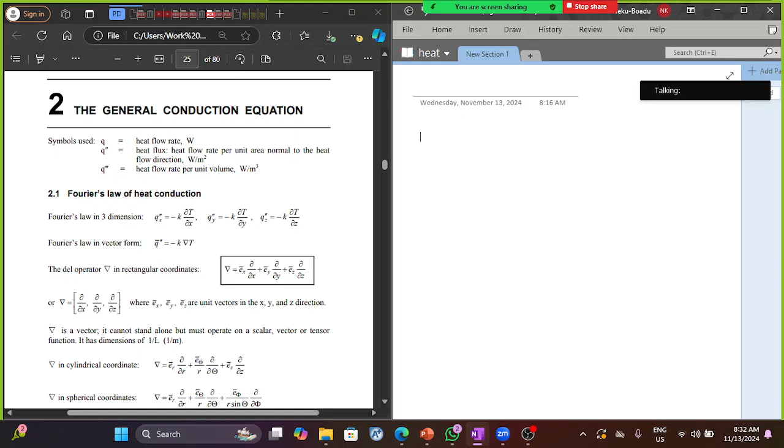So the negative sign here shows that there is loss of heat from one point to another, that's why I have the negative sign over here. Okay, so this equation can be represented in two dimension, one dimension, or three dimension. So the one we are having here is in three dimension. I hope you know what this operator means.

Okay, so writing it in vector form, we can have this equation over here. So expanding this, we can just multiply the T by whatever we are having here, so that we have the conduction heat equation in three dimension. As I said earlier on, you can also have it in two dimension or one dimension.

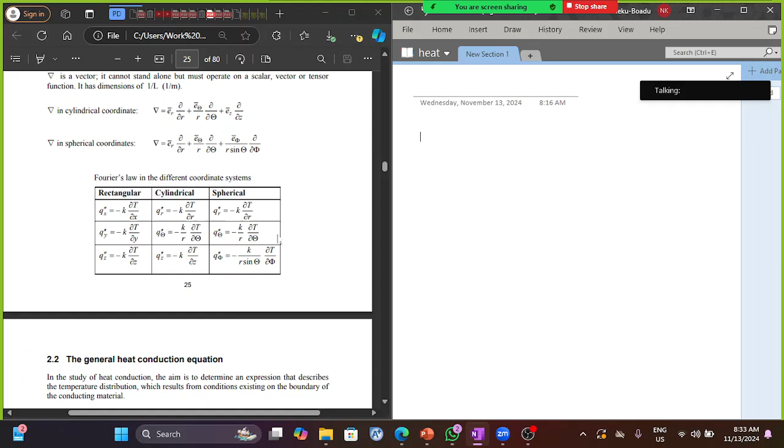Okay, so we can also have the equation in the rectangular coordinates, where we consider the x, y, z. They also have the cylindrical coordinates, which in this case we consider the radius.

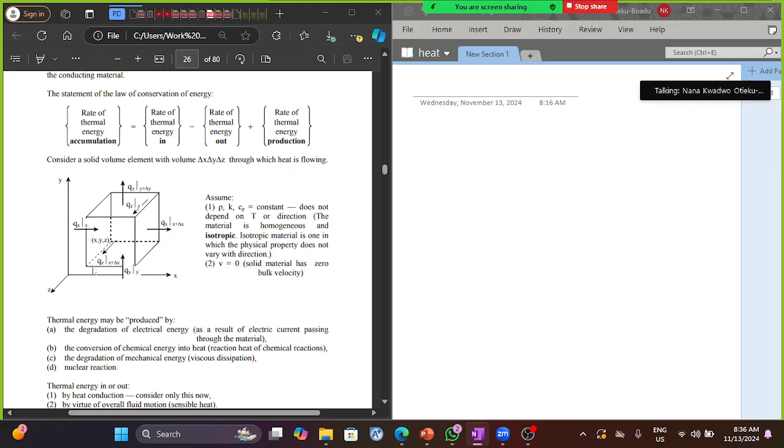The assumptions made here are that the density, the thermal conductivity, and the specific heat capacity are all constant and don't depend on the temperature or the direction. The material is homogeneous and isotropic, meaning the physical property does not change with direction, so at any particular direction they are constant. Then V is also zero, that is, the solid material has zero bulk velocity.

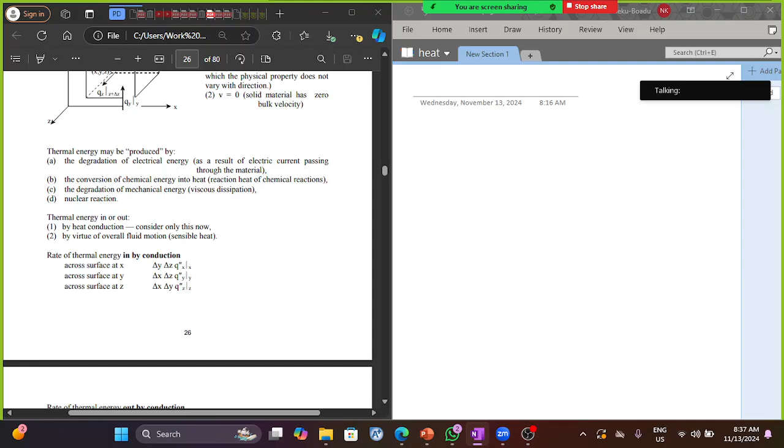So when it comes to the thermal in or thermal out by heat conduction, we only consider this for now, then by virtue of overall fluid motion, so you consider the conduction aspect and also consider the sensible heat. We are not considering convection or radiation, only the conduction aspect of it.

Since it's conduction, there should be a solid medium through which the heat can be transferred, and that solid medium should have a bit of thickness at least for the heat to pass through to the other point. So when you consider the component, for instance, in the x direction, you can see the thickness is this entire thing over here, from this point to this point. So we have one surface here and another surface over here, so from here to here comprises the thickness.

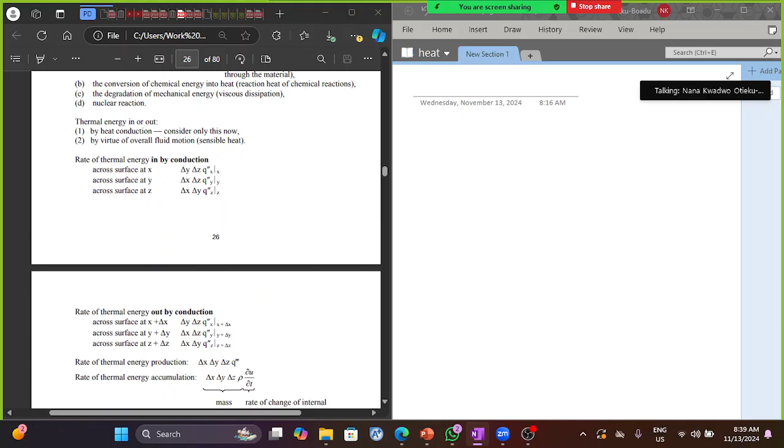We can do that across the x, the y, and the z component. When you take the surface at x, you have delta y delta z multiplying the heat flux. What we are having here represents the area, and when you multiply the area by the heat flux, you get the heat being transferred. The same applies to the y and the z direction as well.

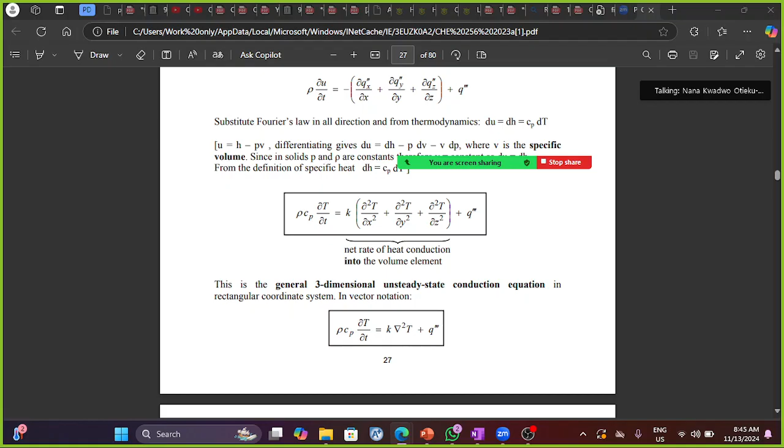When you factorize the t out over here, we get a term known as the Laplacian operator. So you can represent that term by the sign you are having over here, which represents the Laplacian operator, so what you have here can equally be represented in this condensed form. This is the representation of the Laplacian operator, so you are just multiplying it by the t to get this format over here.

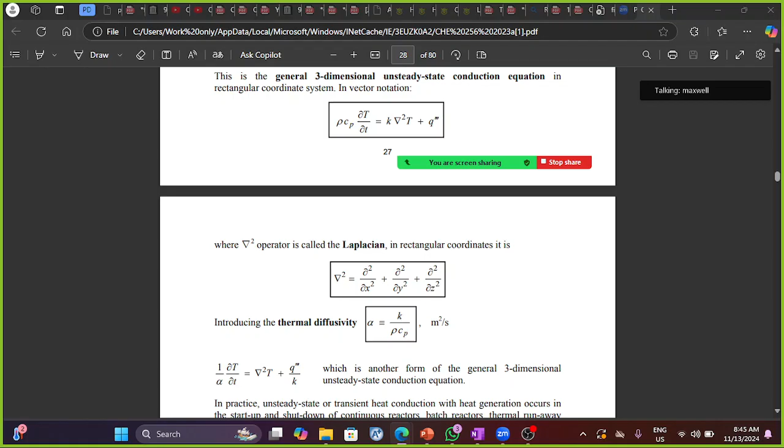I wanted to know, when you were explaining the formulas, you said the first term goes to zero. What's that term? Can you go up a bit, please? Is it this one? Where's the mouse pointer?

Okay, this term goes to zero when we are considering steady state processes.

But then you said something and I forgot. You said, is it the Q to the power of three or two? You said it goes to zero. That's when they tell you there's no production of heat, it goes to zero, right?

Yes. And I'm also asking about the one on the left hand side of the equation, you also said a term for that one. Okay, so this is the accumulation term, the rate of accumulation.

So when there's no rate of accumulation, that term is zero.

Yes, and that will happen when we have steady state processes. So if it is steady state, this term goes to zero. Thank you so much. You're welcome, I hope you know what steady state means.

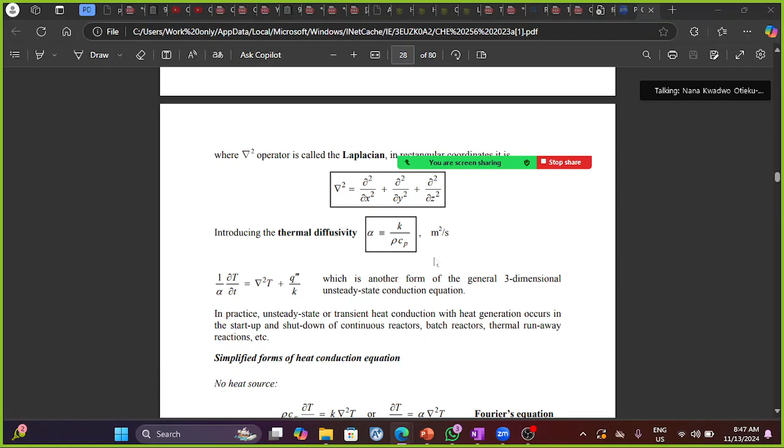We continue from here. We are also introducing another term known as the thermal diffusivity, alpha, represented by K over rho Cp, and the unit for that is meter squared per second.

To get this term, when you divide through by the thermal conductivity, this K term becomes 1, so it won't appear here. Then this one becomes per K, that is Q prime prime prime over K. Then we have rho Cp over K here.

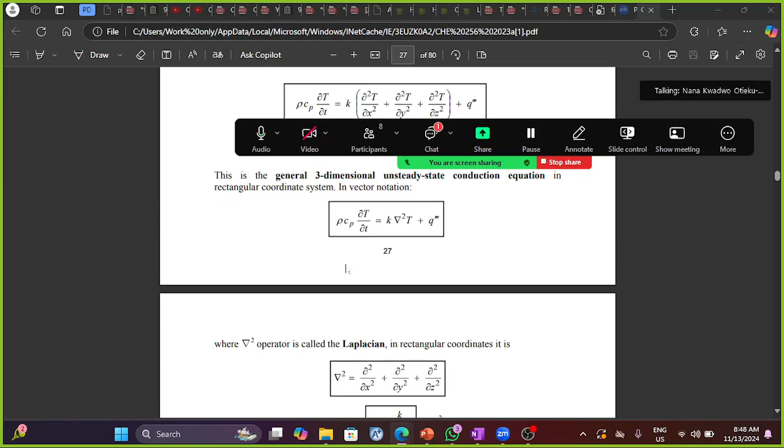We know that alpha is equal to K over rho Cp, which means that if I have rho Cp over K, that term becomes the inverse of alpha. So we are going to have this term in the 3D format here.

We have some simplified forms of the heat conduction equation. What we have here represents the general form of the conduction equation. Any of these, 1 or 2, represent the general conduction heat equation, and you can simplify it depending on the condition of the process.

In a case where we have no heat source, no production of heat, the Q prime prime prime term goes to zero, and that equation becomes the Fourier's equation.

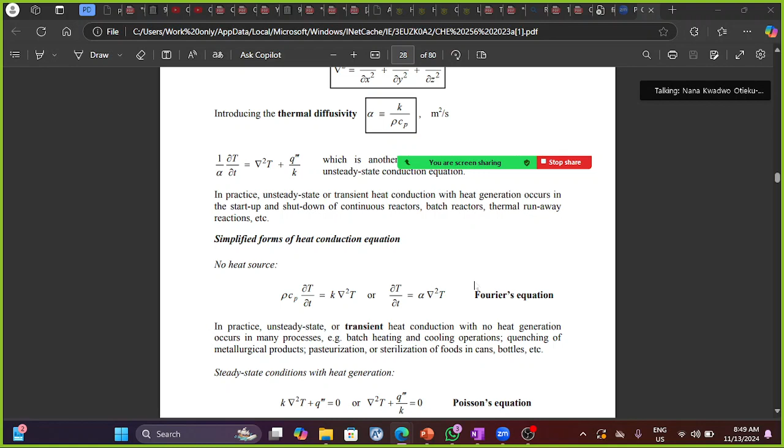Then when you consider steady state conditions with heat generation, the accumulation term goes to zero, so we only have the right side of the equation, and that equation is known as the Poisson's equation.

Then in the case where you consider steady state conditions and no heat source, we have the Laplace equation.

So to solve this differential equation, you need boundary and initial conditions to solve those equations.

Boundary conditions are restrictions or specifications applied at the physical boundaries of the system. Initial conditions are specifications applied at a specific time for unsteady problems.

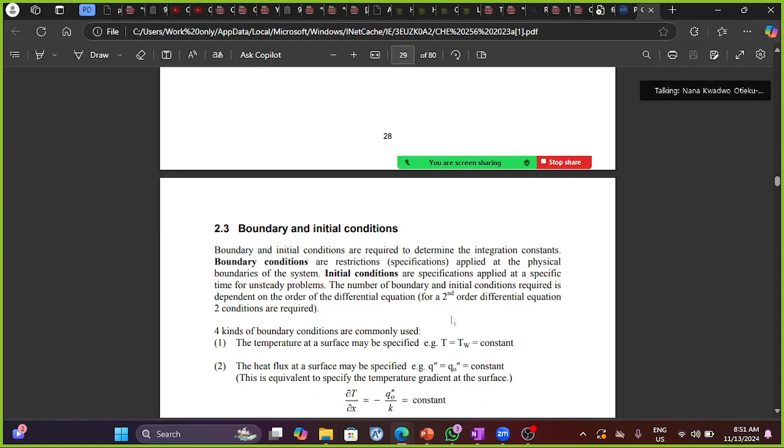So when they give you the problem and you are solving it, you get your initial conditions and your boundary conditions, and that will help you solve the differential equation you are having.

There are four kinds of boundary conditions commonly used in this course. The first one is that the temperature at the surface may be specified, and this temperature is TW, which is mostly constant.

Then we also have the heat flux at a surface that may be specified, and that's also constant.

Then you can also have, at a solid fluid interface, the heat flux may be related to the difference between the temperature at the interface and that in the fluid by Newton's law of cooling. So the solid part has to deal with the conduction aspect.

Hi. Someone is asking a question. Can you talk?

Okay, then we can continue.

The solid aspect has to deal with the conduction aspect, then the fluid aspect will be governed by the convection aspect. The law we mostly use in the convection aspect is Newton's law of cooling. So this left side represents the conduction aspect, and the right side represents the convection aspect.

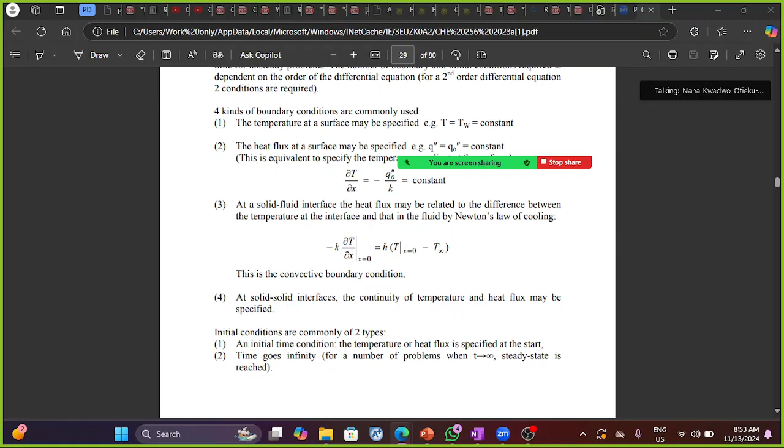Then you can also have a solid-solid interface, where the continuity of temperature and heat flux may be specified. They also have initial conditions, which are of two types: an initial time condition, where the temperature or heat flux is specified at the start, and time going to infinity, where the steady state is reached.

So these are some of the boundary conditions and the initial conditions that you can get, depending on the problem that has been given to you.

So we continue from that part. We consider steady state heat conduction in one dimension. The general form was in three dimensions, but as I said earlier, you can have it in one dimension, two dimensions, or three dimensions. In this case, we are going to consider only one dimension, and also consider steady state.

So when you go to the equation, our accumulation term goes to zero. When it comes to this topic, our objectives are to determine the temperature distribution and also to find the heat transfer rate.

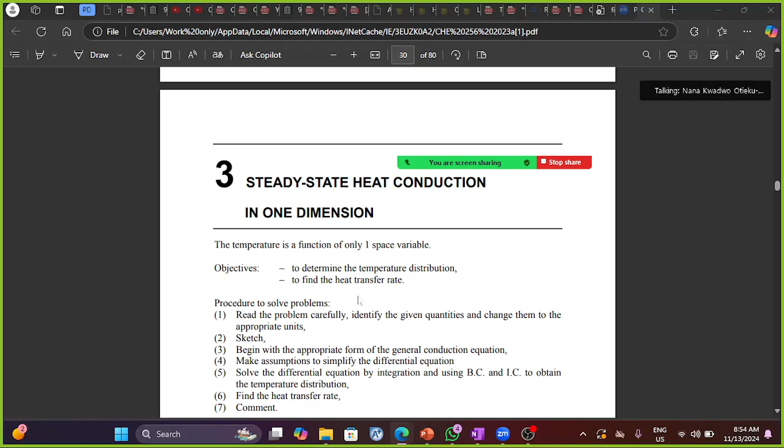We'll consider problems related to plane geometry systems, and also problems related to spherical systems. We'll first start with plane geometry systems: heat conduction in a plane wall.

The assumptions here are: T is a function of the x direction only, that it only varies in the x direction. They also consider steady state, then also consider isotropic material, that is our k, rho, Cp are constant. They also consider there is no internal heat generation.

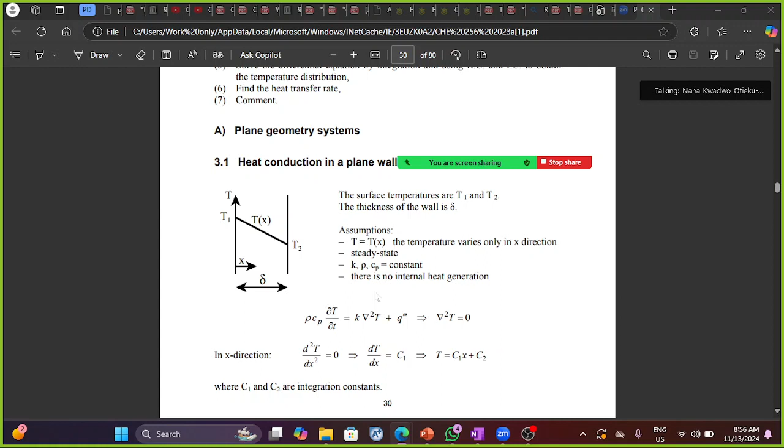In that case, when simplified, the equation gives us the Laplace equation, which is this equation over here. Writing this out, we get this term. Applying differential equation solutions, we integrate this term, and when we integrate that, we get this term over here, and whenever you integrate you have to introduce a constant.

So the first integral gives us a constant C1. Then when you further integrate this term, you get another term, and you add another constant to it, so you have C2. Solving this, you need boundary conditions and initial conditions to solve this equation.

So at this point, at the surface, we can consider when x is equal to 0. We are starting from x from this point. So when x is equal to 0, our temperature becomes T1, which is on this surface. And when x equals delta, from this point to this point, our T becomes T2.

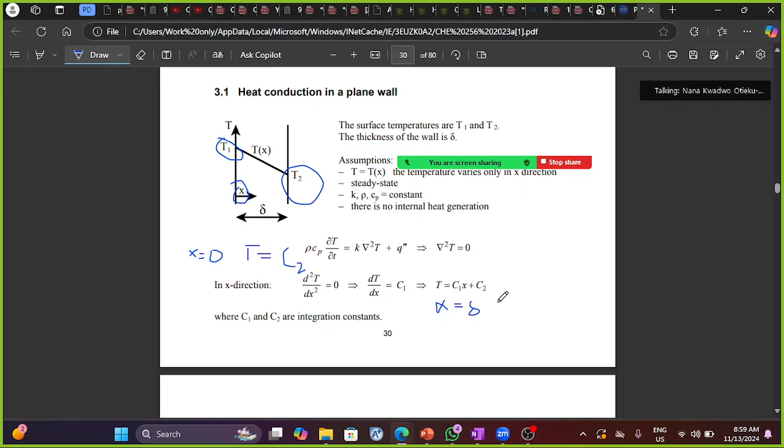And when x is equal to delta, we have our T to be equal to T2. So when you solve for C1 and C2, you have boundary condition 1: when x is equal to 0, you have T equal to T1. Then solving the equation, you have T1 equal to C2.

That is this term at this point. Then when x is equal to delta, we have T equal to T2. So in this case, we are going to have T2 equal to C1 delta plus T1. So substituting and solving for C1, we get C1 equal to T2 minus T1, over delta.

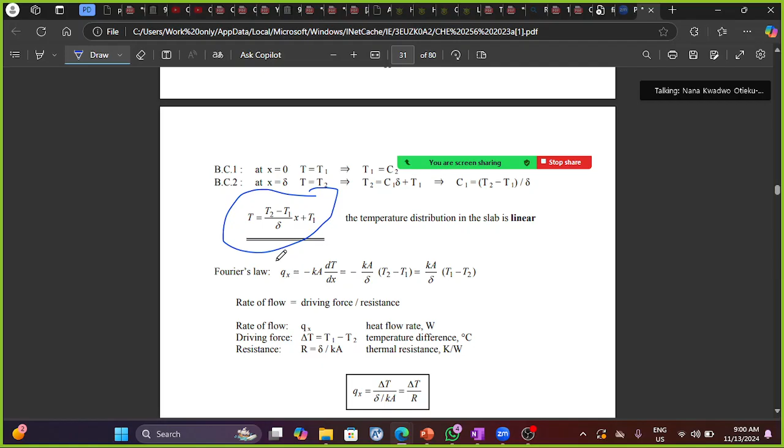So when you substitute C1 and C2 back into the equation, we get this solution. Looking at this solution, we can see that the temperature distribution is linear.

Are we okay? I mean, I just have it here. Look, I'm about to restart it for it to work.

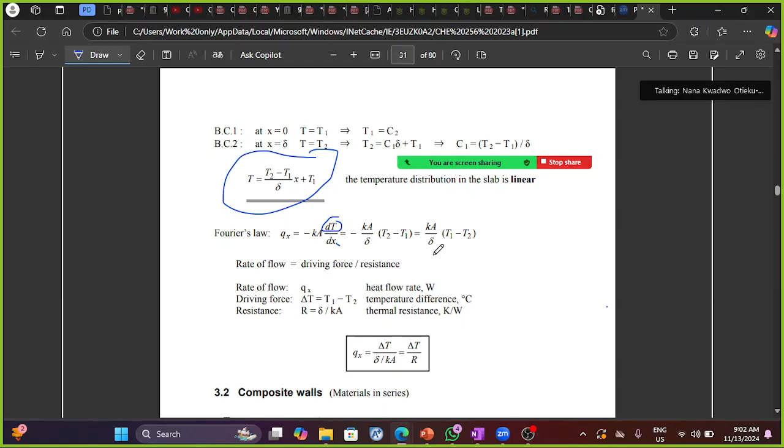If they ask you to find the heat flux, they are simply asking you to divide this equation by the area, dividing both sides by the area. So when you divide both sides by the area, the left side of the equation becomes the heat flux, mostly represented by Q prime prime. This Q prime prime represents the heat transfer that is being transferred over the area.

The heat transfer Q can also be represented in terms of the driving force over the resistance. When it comes to heat transfer, our driving force is the temperature difference, because if there is no temperature difference, there won't be heat transferred. So the temperature difference represents our driving force in this instance. Writing it in that format, the heat being transferred is equal to the temperature difference over the resistance.

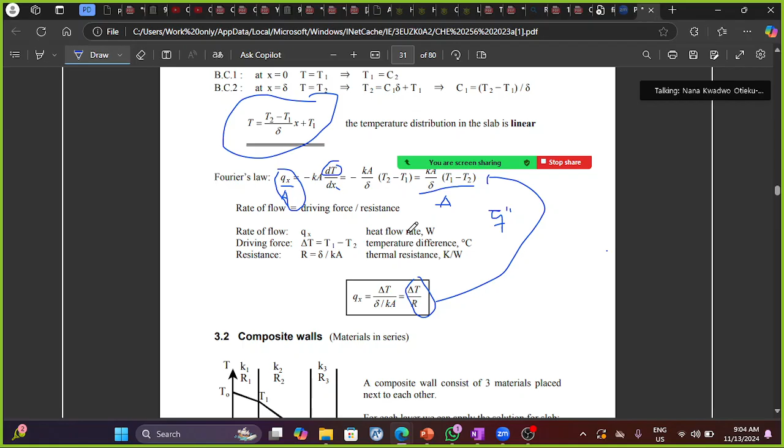So this one we have a single plane wall or a single slab. We can have slabs in series, having two or more. In a case when we are having them in series, that's when you have composite walls. We are going to consider the heat that is being transferred in each of the walls. So doing that, you have to identify the thickness of each wall.

Assume you're having three walls. We have the thickness of the first wall to be delta 1, the thickness of the second wall to be delta 2, and the thickness of the third wall to be delta 3. Each of these walls is going to have their respective thermal conductivities and the resistance they offer when heat is being transferred from one point to the other.

Considering the first slab, we have the temperature T naught being reduced to T1. Then T1 also reduces to T2, then T2 reduces to T3. So is the same heat being transferred through each of the slabs? We can say that the heat transfer in slab 1 is equal to the heat transfer in slab 2, which is also equal to the heat transfer in slab 3.

Making everything simple, we can represent that in the table we are having. Considering the first slab, we have our temperature difference delta T1 equal to T naught minus T1, as said earlier. Then we have delta T2, this term over here, then delta T3, we have T2 minus T3.

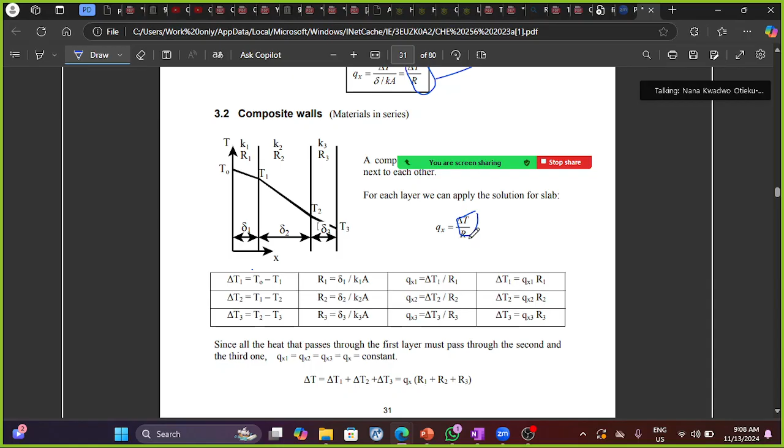Then in this case, the heat that is being transferred in each of the slabs is going to be this. Then when we make our temperature difference the subject, we are going to have Qx multiplying the resistance over here. That's when you make change in T the subject over here. We have R multiplying Qx. So that's what we are having over here.

Okay, so the overall resistance is also going to be the sum of all the resistances in the slab. So we add this resistance to this and also add this to this, and that gives us the overall resistance in this composite material over here.

Okay, so when you do that, we are going to have our Qx to be equal to change in T over RT, which is represented by R1 plus R2 plus R3, and that is equal to the overall temperature difference over the sum of all the thermal resistances.

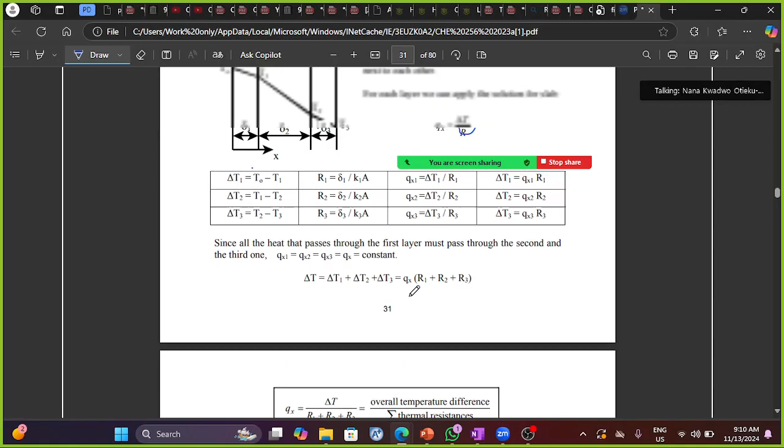Okay, so what this is just telling us is that it's not all instances that they are going to give you the temperatures at the various walls, but they can give you the temperature at this surface and also give you the temperature at this surface. So having the temperature at this surface and this surface, you can equally calculate the heat that is being transferred. And if they ask you to calculate the temperatures at the inner surfaces, you can also do that, because now you have the overall heat transfer, which is equal to the heat that is being transferred in the individual slabs.

Okay, so when you rewrite this, we can have our heat transfer to be in this format. Then this represents our resistance and this represents our overall heat transfer.

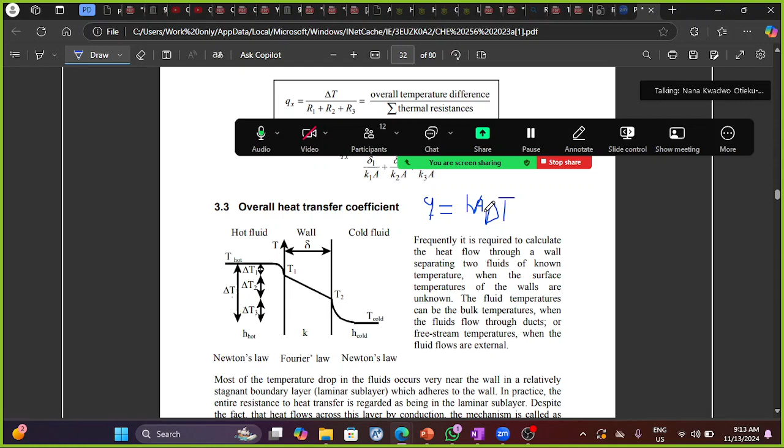Alright, so Newton's law states that Q is equal to the heat transfer coefficient H multiplying the area multiplying the temperature difference. So this is the Newton's law of cooling. The H here represents the heat transfer coefficient. Then we have our surface area over here. Then we have our temperature difference over here.

Okay, so when you take the hot fluid over here with a heat transfer coefficient to be H hot, our temperature difference here is going to be the T hot and the T1. Then when it comes to the wall, our temperature difference is going to be T1 minus T2. Then when it comes to the cold fluid, our temperature difference will be the T2 minus the T cold over here. So considering the overall temperature difference over here, we are going to have T hot minus T cold.

That is when you consider the resistances offered by each of them. So the hot fluid is going to offer some resistance. Then the wall is also going to offer some resistance, and the cold one is also going to offer some resistance.

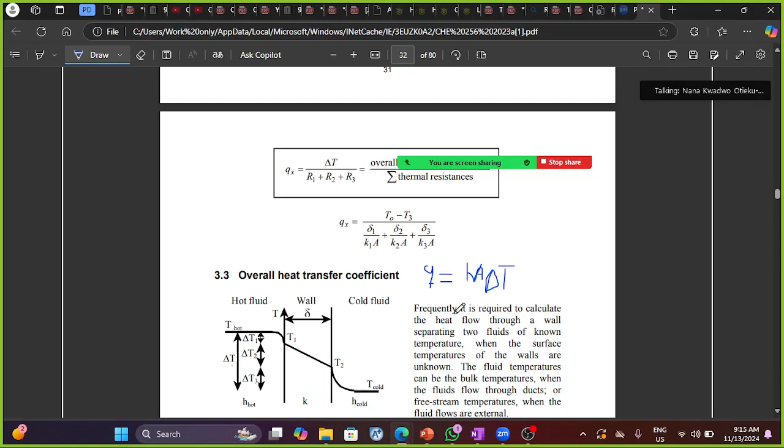Okay, so when you add all the resistances together, then consider the overall temperature difference to be equal to Q multiplying the overall resistance. We are going to have our overall temperature difference to be T hot minus T cold, as we've seen when doing the composite material.

So for the hot fluid, we are going to have our temperature difference one to be in this format, then we have our Q multiplying this, which means this term represents our resistance offered by the fluid, that is between the fluid and the surface.

Then when it comes to the plane wall aspect, we are going to have our temperature difference equal to Q multiplying delta on Ka, which means this represents our resistance. And when we go to the cold fluid, our temperature difference becomes T2 minus T cold, which is equal to Q multiplying what we are having over here, which means this term represents the resistance in that fluid. Taking all these three resistances together, we can have the overall resistance.

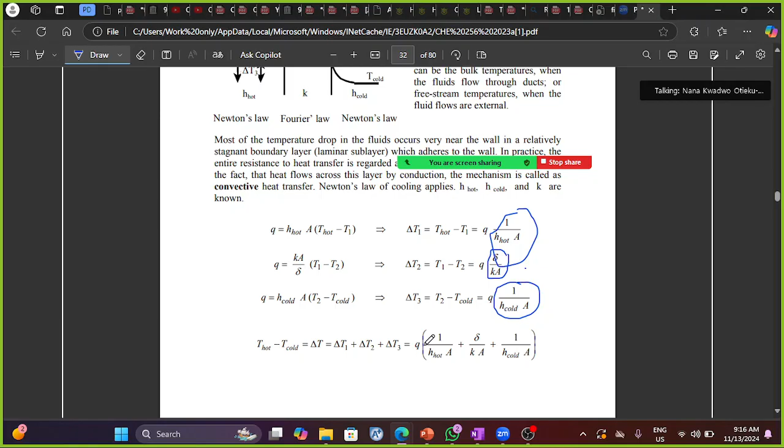That resistance is being offered when the heat is being transferred from the hot fluid from that surface to the other surface. So that's what we're having over here. This whole term represents our overall resistance, which is RT.

Making Q the subject from this relation, you are going to have Q to be equal to T hot minus T cold over the total resistance. So when you factorize the area out and divide through by area, we are going to have Q on A to be equal to T hot minus T cold over 1 over H hot plus delta on K plus 1 over H cold.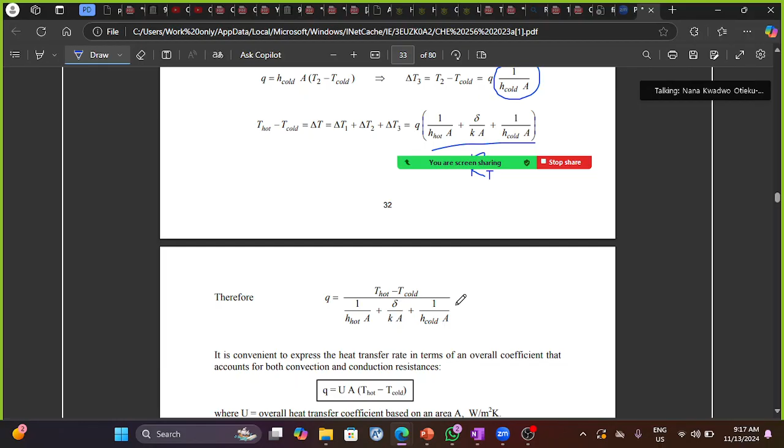So doing that, whenever we have Q on the area, it means you are finding the heat flux. So they can equally ask you to find the heat flux from this term over here.

It is convenient to express the heat transfer rate in terms of an overall coefficient that accounts for both convection and conduction resistances. So in this case, you are going to have Q to be equal to UA multiplying T hot minus T cold.

When you compare this equation to this equation over here, we can see that the Q here will cancel the Q here, then the temperature difference here will also cancel the temperature difference. Our area here is going to cancel the area, because when you factorize the area out, this area is going to cancel that. Then we have our U to be equal to 1 over H hot plus delta on K plus 1 over H cold.

These are some of the things I wanted to write, not to just show them.

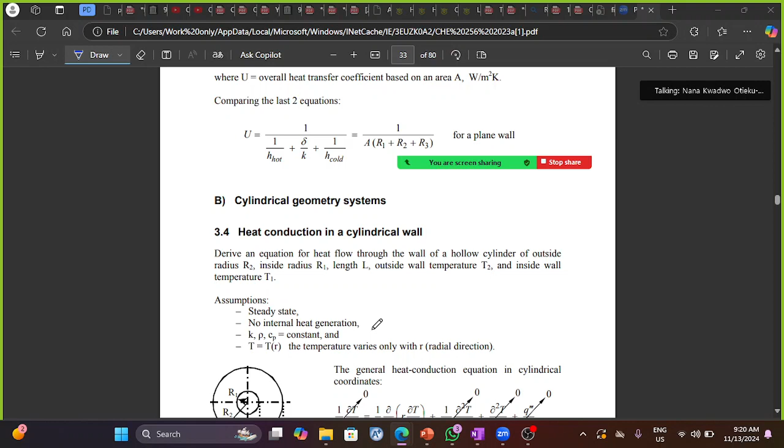So you can equally have this also in the cylindrical geometry system. In that case, you are going to consider a cylinder with a radius r here. So writing the general conduction equation in the cylindrical coordinate, we are going to have this whole equation over here.

And remember, our assumption states that we are considering steady state, which means the accumulation term goes to zero. They also consider isotropic material, which means that our K, rho, Cp are also constant in every direction. They also consider only the radial direction.

So in this case, we only consider the radial direction. We have this term here going to zero, then we have the z term also going to zero. This is the radial direction term. Then we have this and this term over here, so because you are not considering those, they go to zero.

Then we are also not considering heat production or heat generation, so our term here goes to zero. So we only have zero to be equal to this term over here, and this is still the Laplace equation in the cylindrical coordinate or cylindrical geometry system.

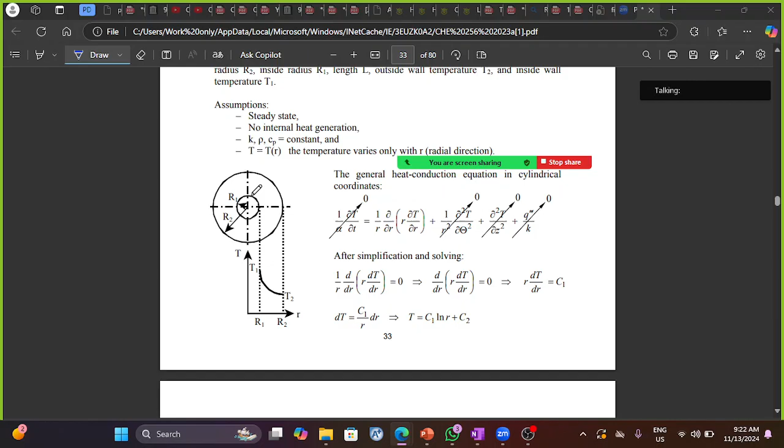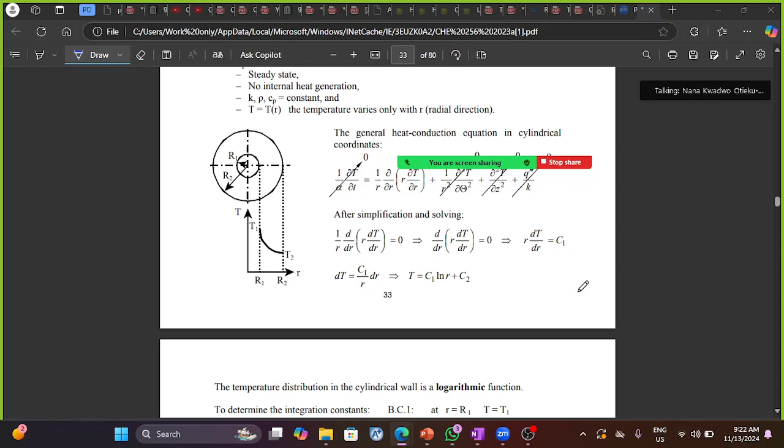To solve for C1 and C2, you need boundary conditions. So the boundary conditions you can make are: when r is equal to capital R1, we have T equal to T1, and when r is equal to R2, we have T equal to T2. So you solve for C1 and C2, then substitute them back into this equation, and that gives you the temperature distribution equal to the equation we have here.

And when you rearrange...

What is? Song, do you have a question? We need Song. Hello, can you mute yourself? But I haven't. Song, please can you mute yourself?

Okay, so when you rearrange the temperature terms over here, you're going to have this term over here.

We are going to have QR.

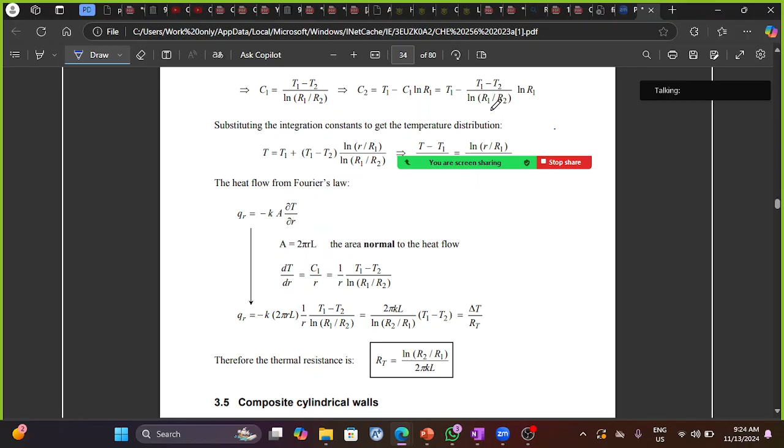Alright, so QR is equal to negative K A delta T delta R. Okay, so when you compare this equation...

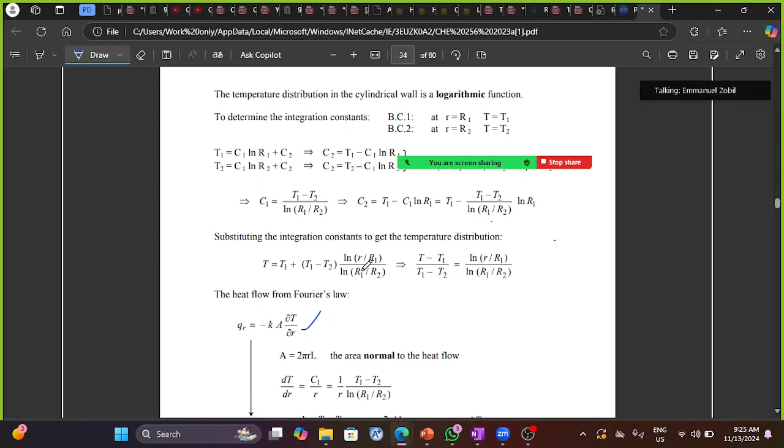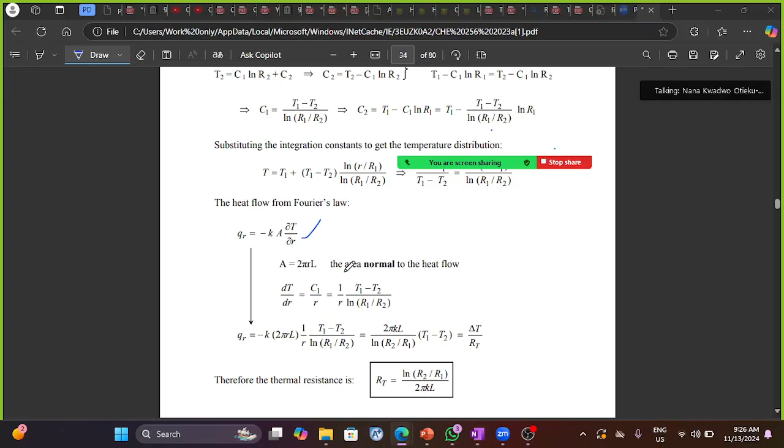From the first integral that we did over here, we can see that the dT/dR will be equal to C1 on r. So when you substitute that into this equation, and knowing C1, we get dT/dR equal to C1 on r from the first integration. We've solved for C1 to be equal to T1 minus T2 over ln(R1/R2). So when you substitute C1 in here, we get dT/dR equal to this whole term over here.

Then when you substitute this term into Fourier's law, we get QR equal to this term over here. And we should note that we are considering the surface area.

So our area is equal to pi D L, and D here is equal to 2r. Okay, so when you substitute that into the dT/dR and the area into this equation, we get the heat transfer equal to this term over here.

Then when you further simplify it, we have this term over here. Then our term here is represented by the temperature difference.

Considering the driving force over the resistance, we get delta T over RT. So when you compare this term to this term over here, we get our resistance equal to ln(R2/R1) all over 2 pi K L.

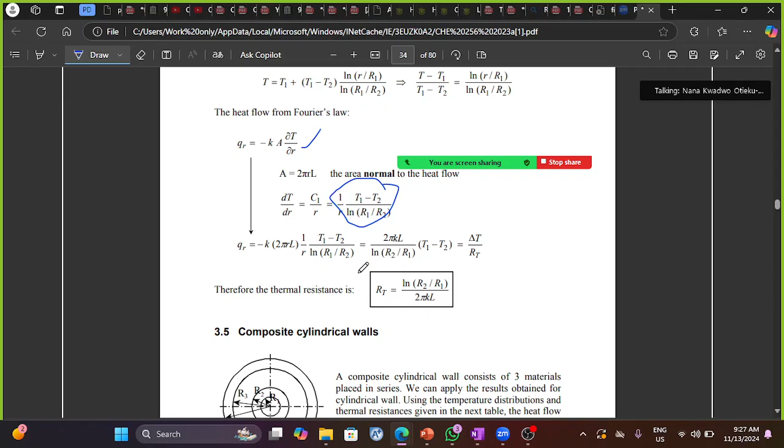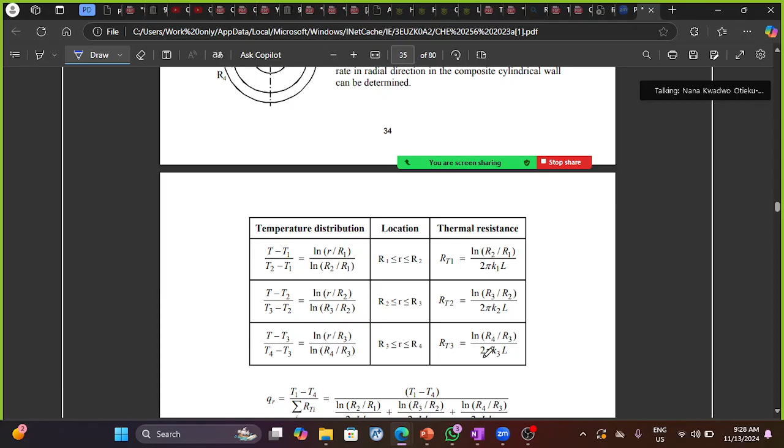So in the case of composite cylindrical walls, we consider the resistances in each wall the same way we did for the plane wall. So we consider the temperature distribution in each wall, then the thermal resistances. So our thermal resistances are going to be this, and the overall thermal resistance is the sum of all three resistances.

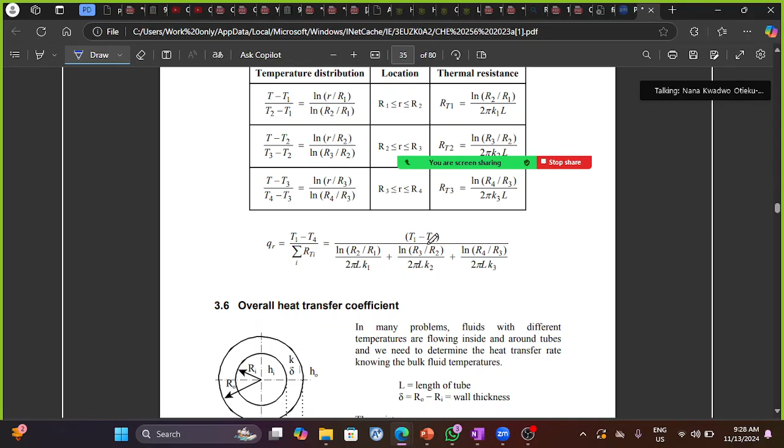So when you substitute that into the heat equation, which is the driving force over the resistance, we get QR equal to T1 minus T4, because our initial temperature here is T1 and the final temperature here is T4. So we have this over here. This is the resistance offered by the first wall, this is the second, and this is the third.

Okay, so we can also express this in the overall heat transfer coefficient format.

So in this case, we are going to consider the same thing. We have our hot fluid inside the cylinder, then we have our cold fluid flowing at the outside surface, then we have the thickness of the cylinder, where the heat transferred through it will be conduction. The heat transfer inside will be convection, and the heat outside will also be convection. So we consider Newton's law and also Fourier's law.

Taking the idea from the resistance you got from the plane wall when finding the overall heat transfer coefficient, you realize that the resistance offered when you have convection is 1 over h multiplied by the area. So for the hot fluid, you have 1 over HI multiplying AI, where AI represents the inner surface area and HI represents the heat transfer coefficient inside.

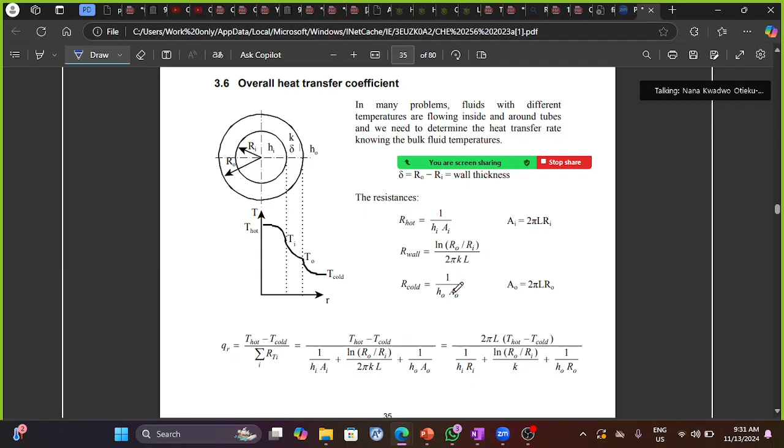They also have the resistance offered by the thickness of the wall in this form. They also have the resistance offered by the cold fluid, which is 1 over H naught multiplying A naught, where A naught represents the outside surface area. So when you substitute that into the driving force over the resistance equation, you get this term.

Then when you compare this equation to this other equation, our QR cancels out, our temperature difference cancels itself out, and we have our UA equal to the remaining term.

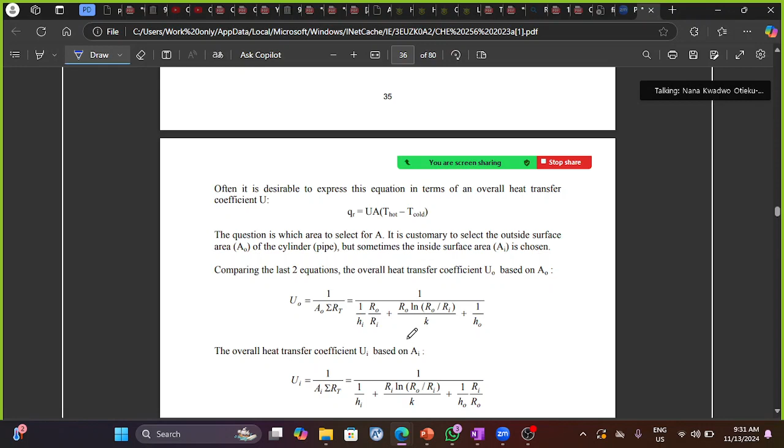So when you simplify everything, we get U equal to this. The U naught represents the overall heat transfer coefficient based on the outside surface area, and you can also write it in terms of the inside surface area, in which case it's UI. You have to take note of this if they ask you to evaluate the overall heat transfer coefficient given the parameters.

We also consider the critical thickness of insulation, and we have an equation for that.

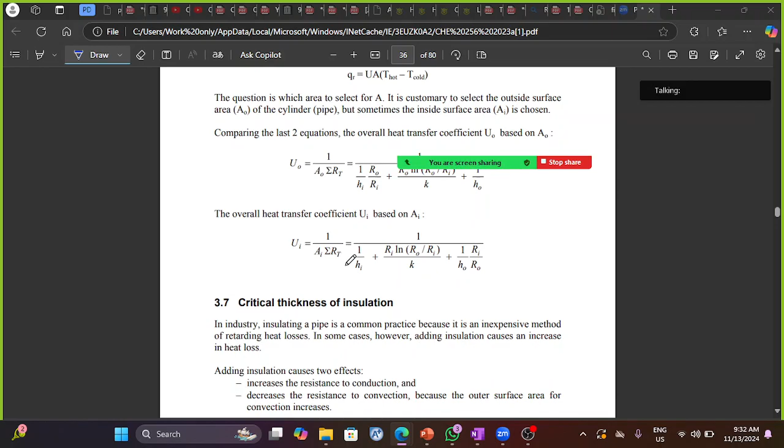If there is no question, then we continue.

When you add insulation to a material, there are two effects that the insulator can cause. One is to increase the resistance to conduction, and the second is to decrease the resistance to convection, because the outer surface area for convection is going to increase.

Let's consider a tube with insulation. The outside radius is R naught with temperature T naught. Then we have our insulator with radius R INS, so the radius of the insulator is from this point to this point. The thickness of insulation is from this point to this point. So if you have the thickness and the outside radius of the tube, you can find the radius of the insulator.

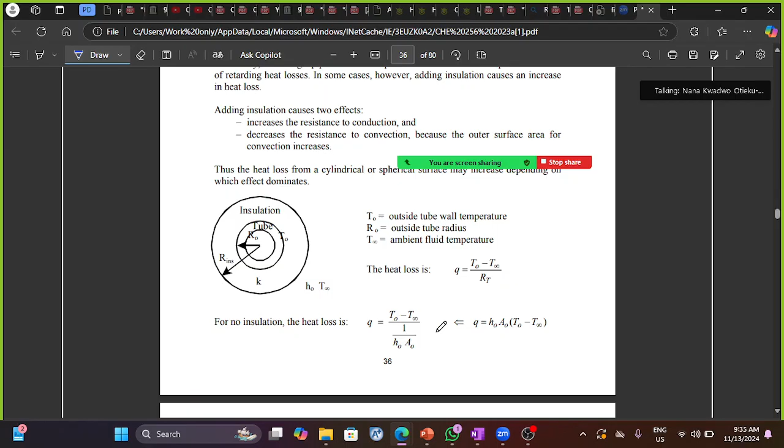In a case where there is no insulator, it means you only have the tube. In this case, it's only the resistance offered by the fluid around the tube that you consider, because there's no fluid inside the tube, so you only consider the fluid around the surface of the tube. There won't be any resistance offered by the thickness of an insulator, because there's no insulator in this case. So we only have Q equal to T naught minus T infinity, all over 1 over H naught A naught.

Okay, so this is from this equation over here, when I rewrite this in terms of the driving force over the resistance.

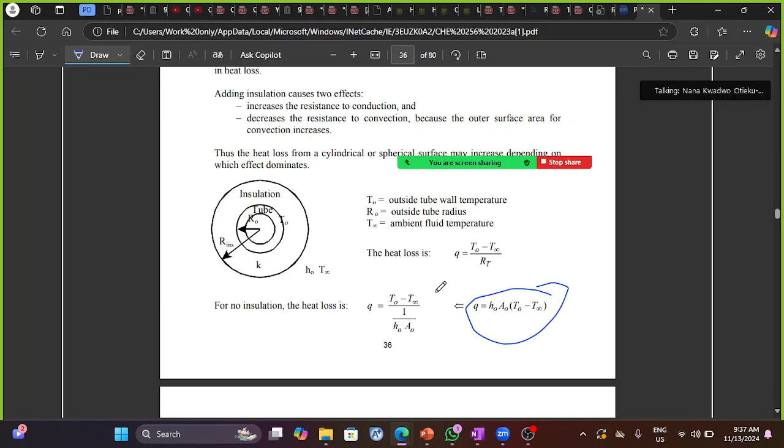Okay, so if they ask you to evaluate, if you have a case in this form and they ask you to evaluate the heat lost without insulation, this is the equation that you are going to use. And if they ask you to evaluate it when there is insulation, then it means you are going to have the insulator resistance to it, which will make the resistance have two terms in this instance.

Okay, so if insulation is being added, we are going to have our total resistance to be this term plus this term, and this term represents the resistance as a result of the fluid flowing around the outside surface of the material. Then this is the resistance offered by the thickness of the insulator that is being added.

Okay, so when you substitute that into the Q equation, you're going to have this equation over here. So if there is an insulator being added to the material, then this is what we are going to use to evaluate the heat that is being lost. So to know whether the insulator is increasing the resistance to conduction or decreasing the resistance to convection, you compare the values of the heat lost when there is insulation and when there is no insulation.

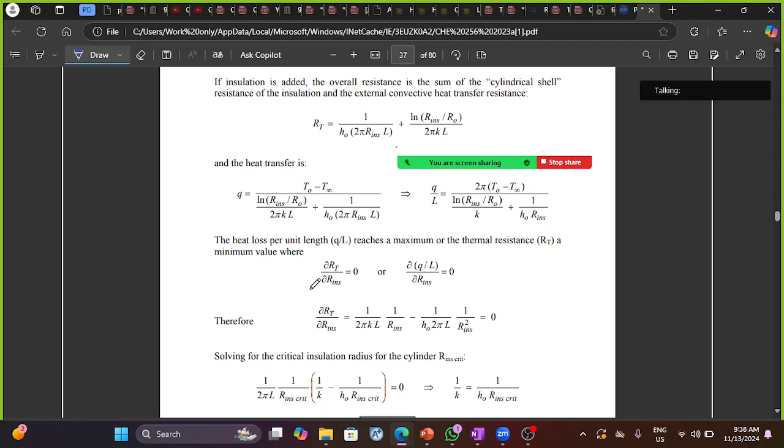Okay, so another term that we can also encounter is the critical insulation radius. So the critical insulation radius, or critical insulation, occurs when we have the maximum heat lost, or when the thermal resistance is at minimum.

So in this case, delta RT on delta R insulation is equal to 0, or delta Q on L on delta R insulation is equal to 0. So solving this differential equation over here, you're going to have this whole term here equal to 0. Then we can see that we have common terms over here.

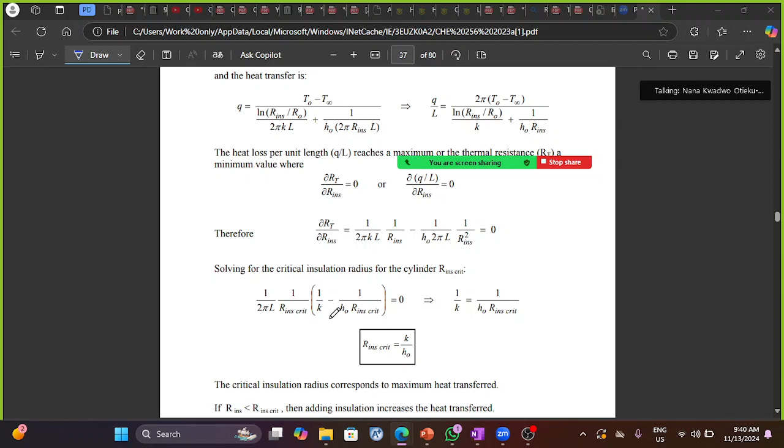Okay, so we have common terms over here that we can factorize. And when we factorize that out, we are going to have this term over here. And because we are equating it to 0, the insulation radius here becomes the critical insulation radius. So when you have this term over here, it's either this term here will be equal to 0, or the term in the bracket here will be equal to 0. That will make this entire thing equal to 0.

So considering the term in the bracket over here to be equal to 0, we are going to have 1 over k equal to 1 over h naught multiplying the critical insulation radius. So making the critical insulation radius the subject, we are going to have k on h naught.

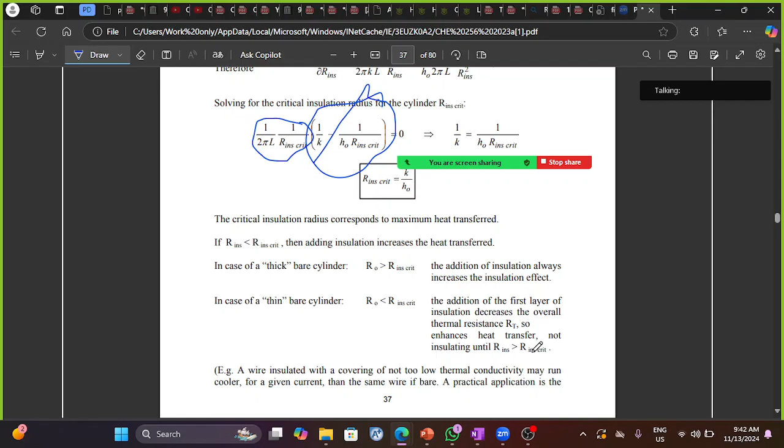Okay, so what will the critical insulation radius tell us? If the insulation radius is less than the critical insulation radius, then adding insulation increases the heat transfer. In the case of a thick bare cylinder, if the outside radius is greater than the critical insulation radius, then the addition of insulation will always increase the insulation effect. And if you have a thin bare cylinder, where the outside radius is less than the critical insulation radius, then the addition of the first layer of insulation will decrease the overall thermal resistance, so it enhances heat transfer, not insulating, until the R insulation becomes greater than the critical insulation radius.

Okay, so all what you have been doing initially is when there is no heat generation. So there will be some. Okay, so what we did here for the cylinder, when we have a sphere, we just multiply the critical insulation radius of the cylinder by 2 to get that for the sphere.

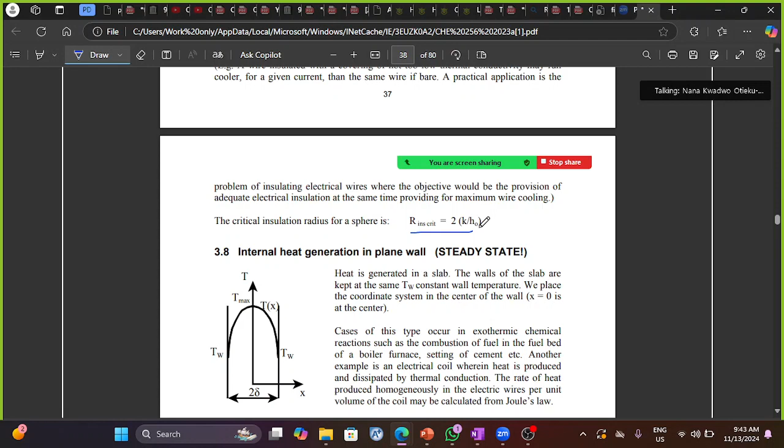Okay, so considering heat being generated in a slab, the walls of the slab are kept at the same wall temperature TW, which are constant. We place the coordinate system in the center of the slab, so from this point to this point becomes negative x, then from here to here becomes positive x, and from here to here is 2 times delta, since we have delta here and another delta over here. So adding these two deltas together, we are going to have 2 delta over here, 2 times the delta over here.

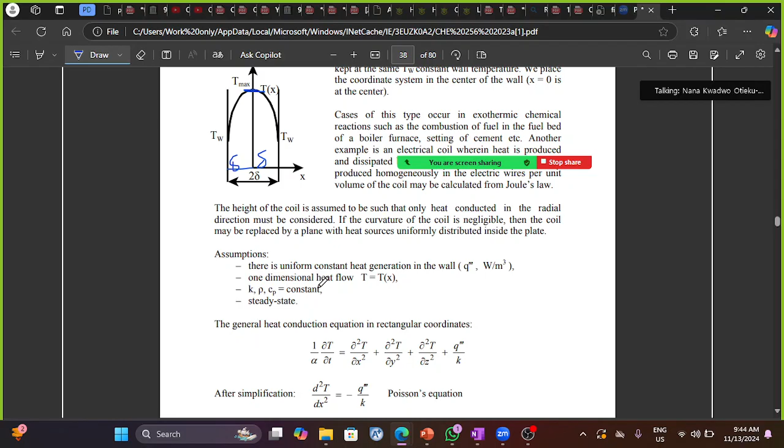The assumptions you are going to make here is that this point is going to be our maximum temperature that can be reached, and TW here represents our surface or wall temperature. So the assumptions are that there is uniform constant heat generation in the wall, with units of watts per meter cubed since it's per volume, one-dimensional heat flow only in the x direction, isotropic material, and steady state conditions.

Simplifying the general heat transfer equation for conduction, we are going to have the Poisson's equation. This term goes to zero because we are considering steady state, then these two terms go to zero because we are considering one dimension, so we only have these two terms remaining. When we simplify, we get this equation which represents the Poisson's equation.

We can solve this equation using the boundary conditions. The boundary condition here is at x equal to delta, that is from this point to this point, we have t equal to...

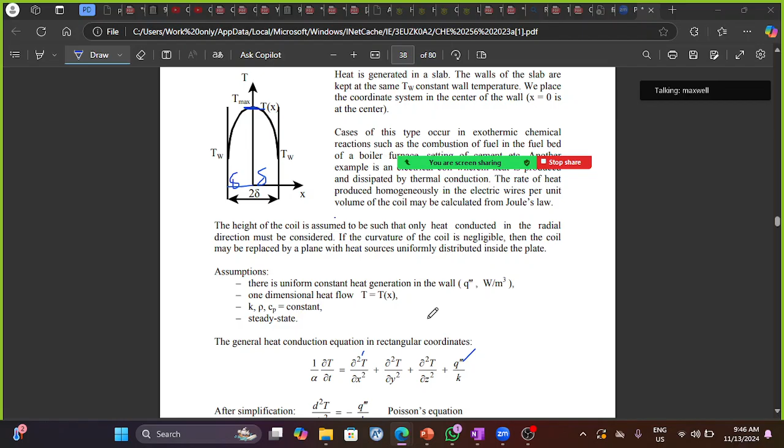So the question was, will an increase in radius increase or decrease the heat transfer, and then why? Is it a composite element? Or is it insulation? Is it a critical thickness of insulation? Yeah, I think I can answer, Maxwell.

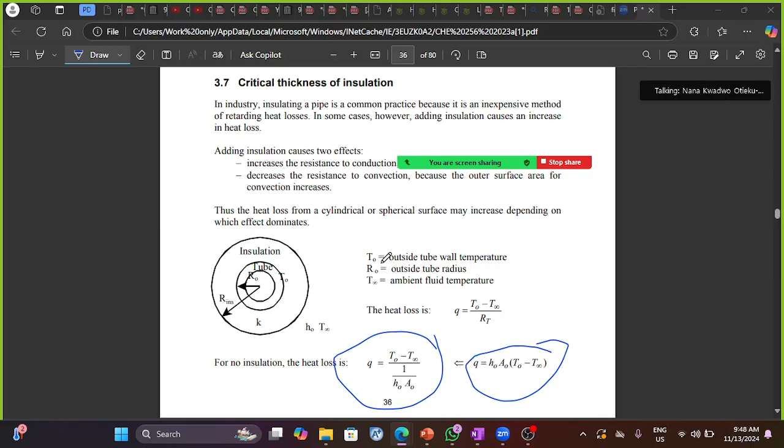If you increase the insulation on the material, what happens is that if you increase the radius, you are going to increase the surface area it has. When the surface area increases, you can increase heat transfer by convection, but you're reducing heat transfer by conduction. So there's a point you get to where we have the critical thickness, or critical radius of insulation. At that value, you have the maximum heat transfer. If you are below that value, you will have more conduction heat transfer than convection; if you are above, you have more convection than conduction. So when you increase the radius, there's a point where heat transfer is generally reducing because you are putting more material on it, but then it gets to a certain limit where continuing to increase it allows heat transfer by convection to happen more. I hope it makes sense. Yes, okay, all right.

So what you were saying can be found here under the critical thickness of insulation. Okay, so we continue.

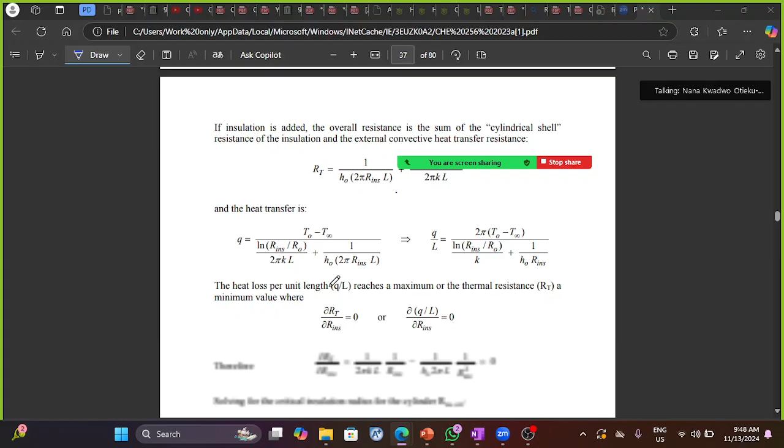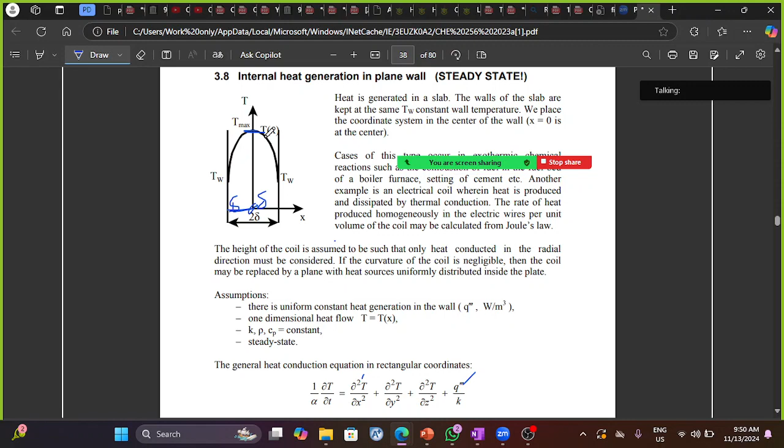The distribution is symmetric about x equal to 0. So at x equal to 0, we have dt/dx equal to 0. When you look at the diagram, we can see that at this point x is equal to 0, and at the top here you can see this is the point of maximum temperature, it's at x equal to 0 that we have the maximum temperature. So that's what they are saying over here, dt/dx equal to 0.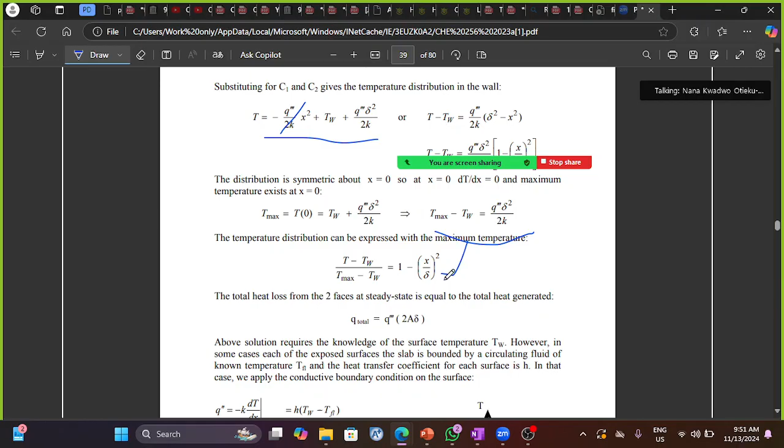The total heat loss from the two surfaces at steady state is equal to the total heat generated, and that is equal to q-prime-prime-prime multiplying 2 times the area and the delta.

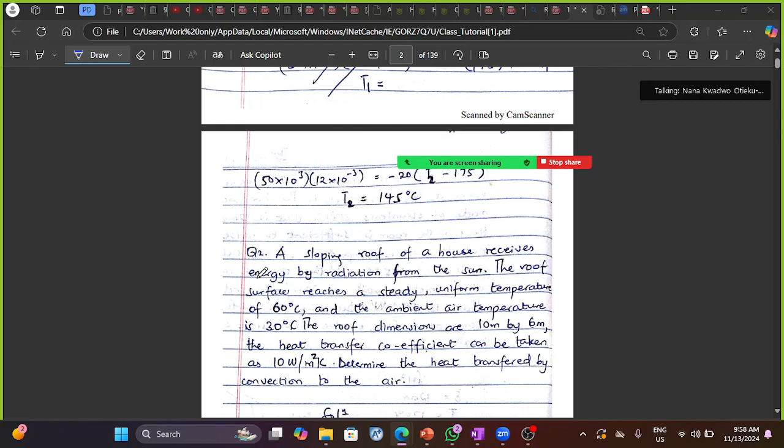Then taking the next question, question 2: a sloping roof...

Makati, you are asking how will you know which is T1 and which is T2, and which one to subtract from the other. When it comes to Fourier's law, we have a negative sign showing there is heat lost when we are transferring heat from one point to another. So if you include a negative sign in the equation, it means you have to subtract T1 from T2, so that the negative answer you get from T2 minus T1 will cancel this negative sign. But if you exclude the negative sign from the formula, then you have to subtract T2 from T1, so it's T1 minus T2. And T1 is always greater than T2.

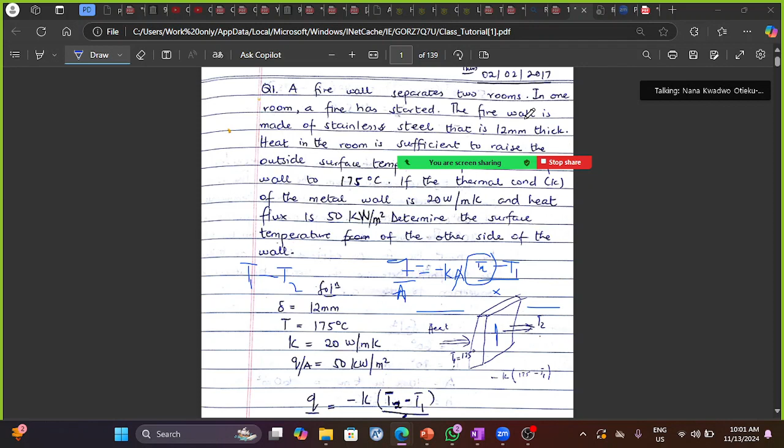In this case, a fire has started in one room. The wall is made up of stainless steel, and the heat in the room is sufficient to raise the outside surface temperature of one side of the wall to 175 degrees C.

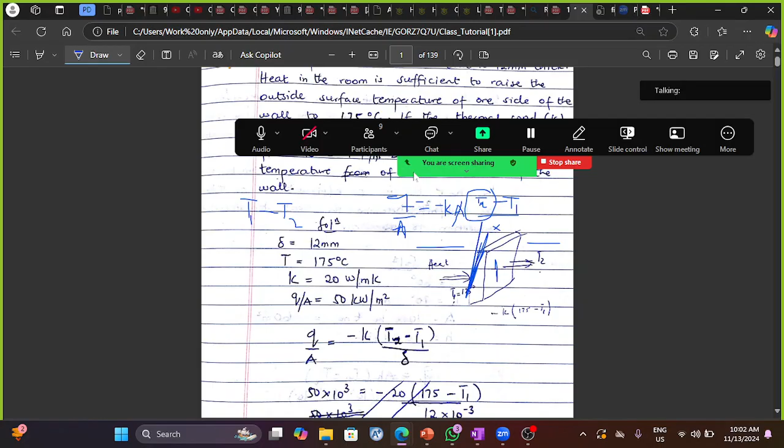Makati, are you okay? Makati, are you okay? All right, so I think we can continue.

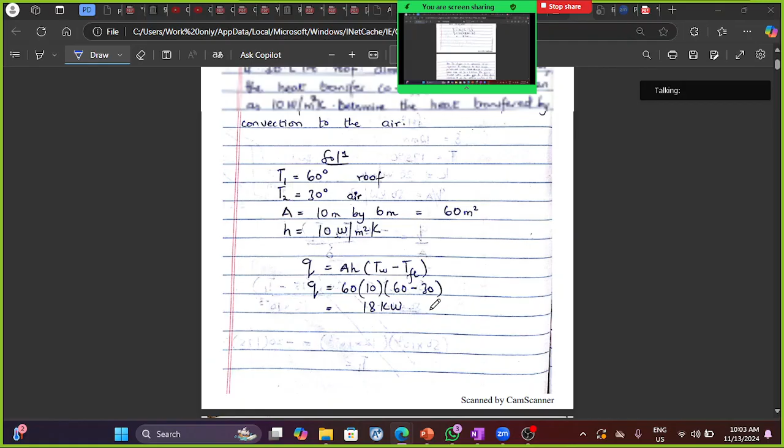A sloping roof of a house receives energy by radiation from the sun. This is a convection heat transfer problem. The roof surface reaches a steady uniform temperature of 60 degrees C, and the ambient air temperature is 30 degrees C.

The roof dimensions are 10 meters by 6 meters, and the heat transfer coefficient can be taken as 10 watts per meter square Kelvin. Determine the heat transferred by convection to the air.

From Newton's law of cooling, we have Q equal to H times A multiplying the temperature of the wall minus the temperature of the fluid. They've given us the temperature of the fluid to be 30 degrees C and the temperature of the wall to be 60 degrees C.

Then we have our dimension of the roof, which is 10 by 6, so we can find the area there. The heat transfer coefficient has also been given, so you just have to substitute and find it.

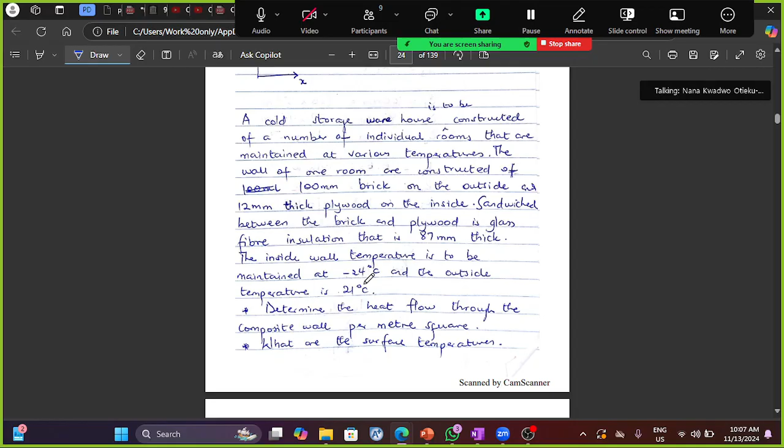In this case, they have given us T naught to be 21, and T3 to be negative 24. When the question is given, if you can put the equation in diagram form, that is good. But if you can't, it's good to leave it like that rather than drawing a wrong diagram.

One thing when solving is you have to indicate your coordinate system, whether you're using x, y, z in this format, and the direction you are using for x. If you are moving in this direction, the x is negative. If this is your positive x direction, then moving left makes x negative. So since we are using this system, moving to the right means our x is positive, and moving to the left means our x is negative. We are assuming our area is 1 meter square.

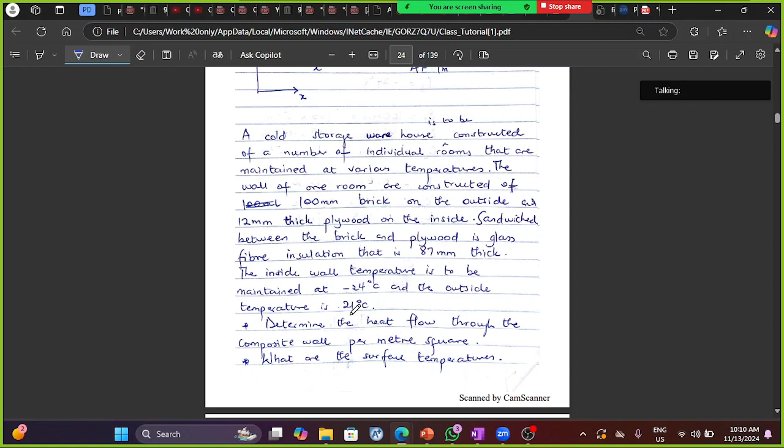We know this is equal to the temperature difference, T naught minus T3, over the total resistance RT. This is equal to this, and we know how to find the resistance when we have a plain wall. So the total resistance is the resistance in the brick plus the resistance in the glass fiber plus the resistance in the plywood.

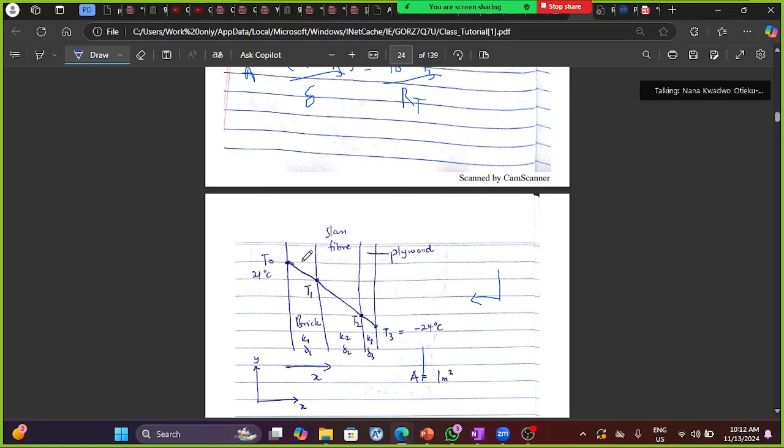How do you find the resistance? Our resistance is equal to delta on K, delta on K. You have the K for each individual plane - brick, glass, and plywood - and also the various thicknesses for them. So you find the resistance for each, then find the total resistance. Then knowing T naught and T3, you can get your heat flux.

After getting the heat flux, you can find temperature T1 and temperature T2 by considering the heat transferred through the brick and through the plywood or the glass. Taking the brick for instance, our Q is K multiplying the temperature difference, T naught minus T1, over the thickness. We know the thickness, K, T naught, and the heat transferred, so the only unknown is T1, which we can evaluate.

When you consider the plywood or glass, we can equally find T2. So in the solution, that's what is practically done: our data is drawn from the equation, using the driving force over the total resistance to find Q. Finding the resistances and heat in each material, we get these terms - one for the brick, one for the fiberglass, and one for the plywood.

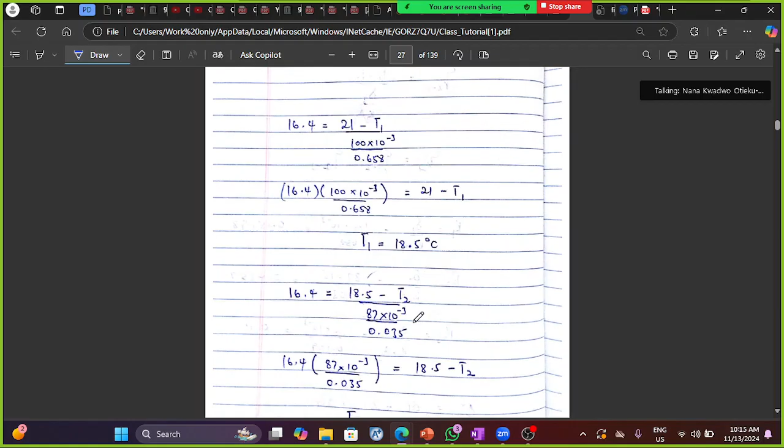We know it's the same heat being transferred in each material, giving us this relation. Finding the resistances in each material and summing them gives the total resistance. Finding the overall temperature difference, T naught minus T3, and substituting into the driving force over total resistance gives our Q. Then we can find T1 and T2: T1 equals 18.5 and T2 equals negative 22.27 degrees C.

Our time is fast spent, so we are going to end the class here, and I'll send you the questions for you to try. After solving, you can reach me out if you have any problem or challenge.